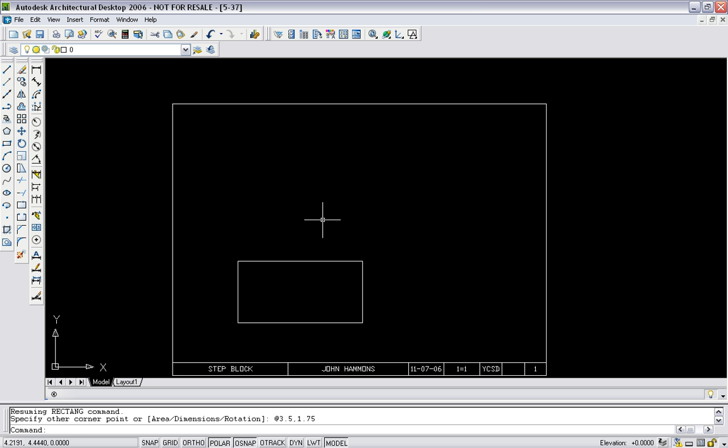And I'm also going to draw my 1 inch boundary square at 1, 1. Now I know where to start my right and top view. My top view is given, so I'm going to go ahead and draw that one. It's 3/4 inches deep by 3.5 inches wide, so I'm going to type in at 3.5, comma 0.75. Alright, and I know my right side view as well. Well, we'll figure that one out in a second.

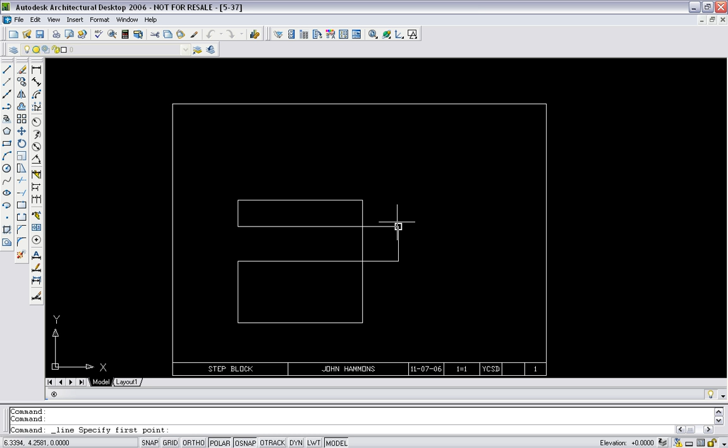I'm going to draw my 45-degree miter line. That should be plenty. You want to make sure the miter line is higher than the edge of the top view. Alright, and also it's going to be wide enough for the outer edge of the right side view. So I'm going to come about right there. That should be plenty. And one of the things in multi-view drawings that you need to get in the habit of doing is projecting your lines.

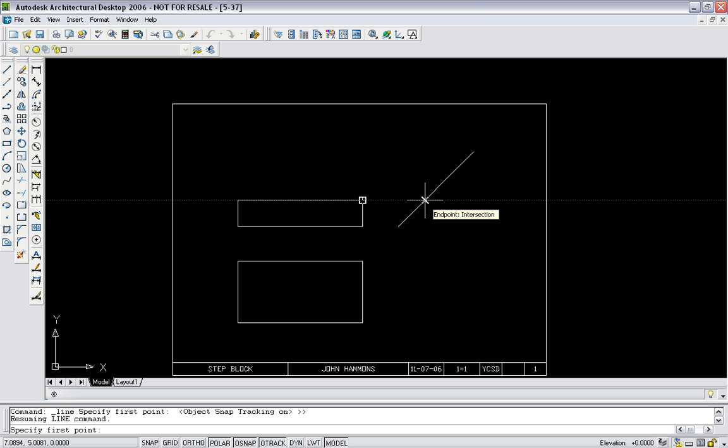And how you do that is you simply, with Polar and O-Snap and O-Track on, you bring over that corner and you come to the intersection. You're going to need the intersection O-Snap on. Let's try that again. It connects to the 45-degree miter line there, and then I know that I'm going to go longer than the bottom of my front view. I do that with this bottom portion here. I'm going to go to this endpoint, and I'm going to go down as well.

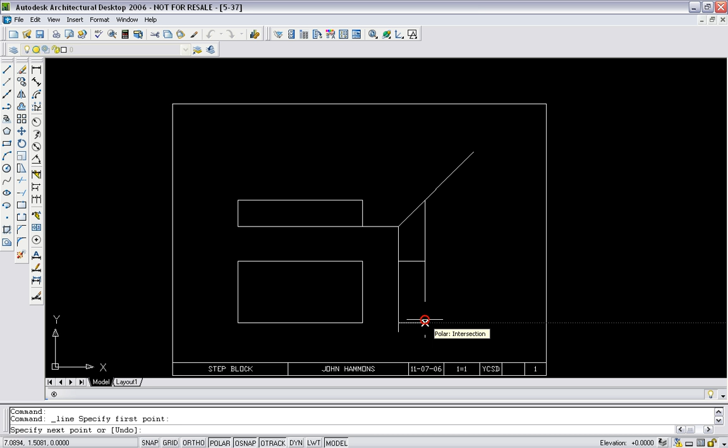And now I just project my lines over from my front view. That's the top. And I'm going to do the bottom, and now I have the outer boundary formed for my right side view. You need to get in the habit of doing that. It'll help you solve these problems down the line, projecting lines over using the 45-degree miter line.

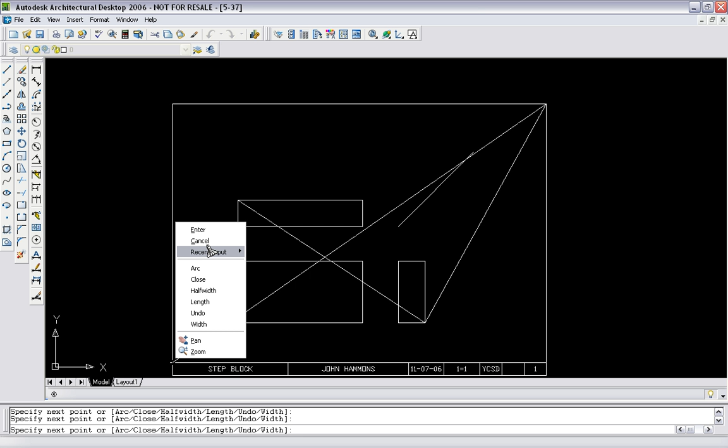Alright, I'm going to go ahead and center this. The next thing you do after you get your boundaries done, you always want to go ahead and center it. Get that done, out of the way. And now you're ready to complete the drawing. Let's draw the notch. It's 1 3/4 inches wide, and I know that my total width from one side to the other is 3.5 inches. Therefore, my notch, being 1 3/4 inches wide, is going to be half the distance.

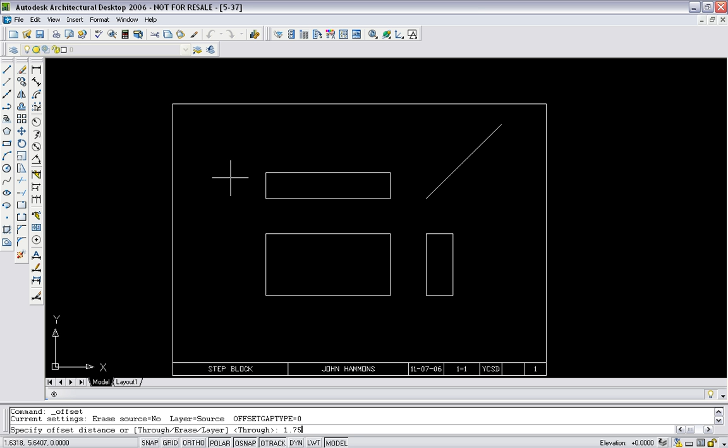So I'm going to take this and I'm going to explode it, and then I'm going to use the offset command, type in 1.75, press enter, and I'm going to offset this line over. And now I know I can project this line down.

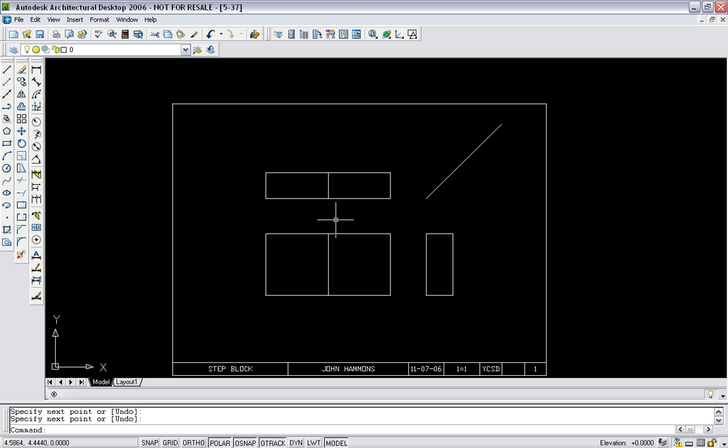Now what I need to do, I've got 7/8 inch deep. I'm going to explode that front view, and I'm going to offset a distance of 7/8, type in 7/8. Now I'm going to offset this top line down. Now that's going to be my notch right there. So I'm going to go ahead and trim away what I don't need. Don't need that. There we go. And the last thing I need to do, I need to project this line over.

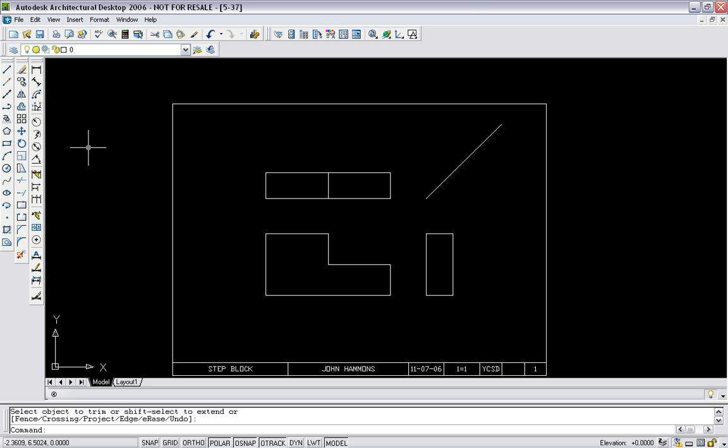There we go. And that's figure 5-37. Your final drawing should look something similar to what I have. Make sure you save it in the correct format. Make sure you have your title block done correctly in all caps.